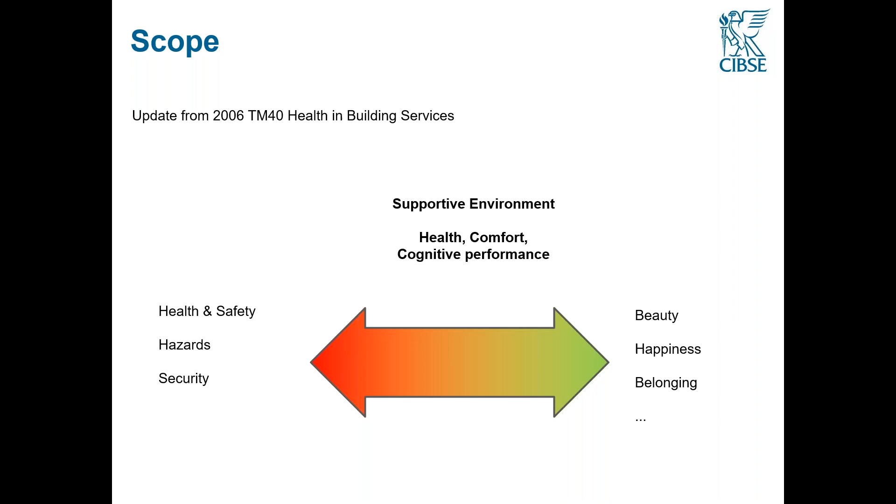The scope picks up from the old TM40 from 2006, but it has expanded it. And essentially, we cover what we call supportive environments. So the environments that can help deliver conditions for health, comfort, and cognitive performance. What it doesn't really cover in detail, though it hints at it, is the health and safety end of the scale, hazard, security, etc., which are well covered elsewhere. And on the other end, everything that contributes to our broader well-being, so beauty, happiness, belonging, etc. It's still just a CIBSE publication, so it focuses on health, comfort, and cognitive performance.

We're covering the main environmental parameters that we know affect health, comfort, and performance. So they are the ones I mentioned before: thermal conditions, air quality, etc. And also the interactions. It's obviously a little artificial to talk about them separately. So wherever we can in the publication, we point to where they link to other things. So thermal conditions and our perception of humidity are very linked, for example.

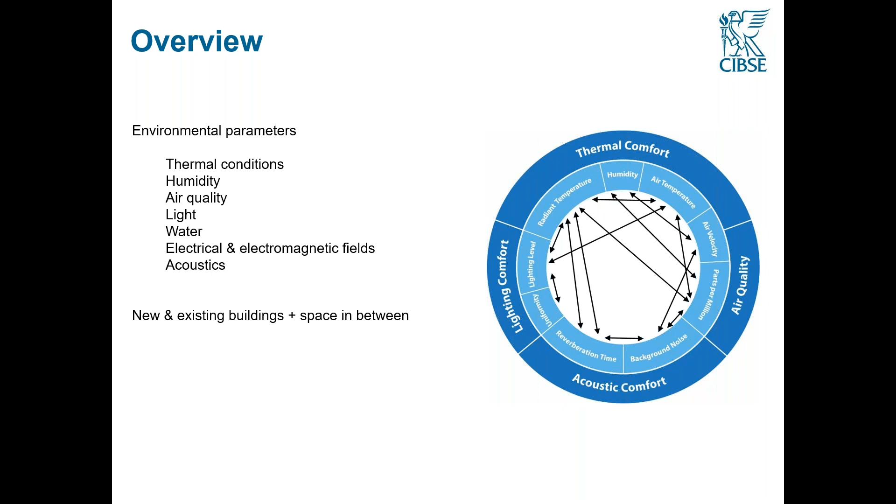And it's a publication that really covers all types of buildings, new and existing, housing and non-domestic, and also a little bit what we call the spaces in between, to highlight the importance that the outside environment can play, not only on the indoor environment, but also on our broader health and comfort. Today, I will focus mainly on indoor environments, but that chapter is there for you. I apologize for the quality of this slide.

Broadly, the approach we have taken throughout the guide is that on every theme, we first cover why. So why it's important, for example, why thermal conditions are important for health, for comfort, for user satisfaction. And that's essentially based on a review of knowledge of what's out there. Then what we call the what, which is how do you define performance criteria for health and comfort? What is a good indoor environment in order to be supportive to our performance? And largely that refers to regulation and the World Health Organization.

Then, once we have defined these performance criteria, we go into the how. How do you deliver these supportive environments? And that's the guidance, which starts from site assessments through to design, construction, operation, and maintenance.

And finally, we have on every theme what we call emerging themes, which are all the exciting bits of research and product development and innovation. So all these things are still debated and might be coming in the future, which hopefully will trigger research and innovation, but also highlight the limits of our knowledge. So places where you might want to put caveats to the guidance that you give to clients.

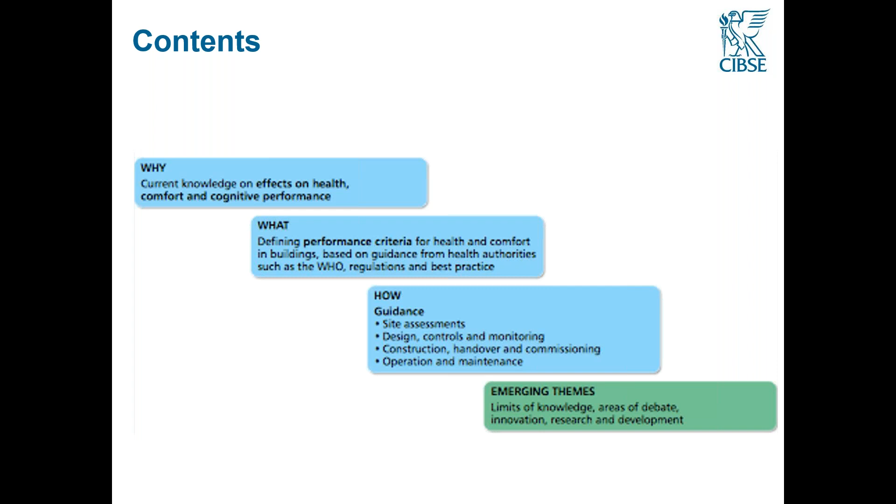Obviously it's a publication, so you can read it front to cover, but I suspect no one ever will. It's structured in such a way that you can actually pick and choose the way you read it. So for example, it may be that clients or people who are establishing a brief only want to read what we call the why. So in every chapter, they can read the first section and know, okay, I understand why all these factors are important if I want to deliver good conditions for health or good conditions for performance in an office. And similarly, to set performance criteria, you might only ever read sections 2 and 3 of every chapter.

So you can read it across or throughout, and it is structured in that way. Hopefully it also means that at some point it could become an online publication that is more modular than the traditional CIBSE guides.

We have tried to, obviously, as a CIBSE guide, focus on the core scope of CIBSE members. And that's places basically where CIBSE members can lead a design. So for example, HVAC controls, HVAC design, and if we were talking about air quality as an example, it would be the location of the exhaust, the ventilation strategy, ventilation rate, filters, etc.

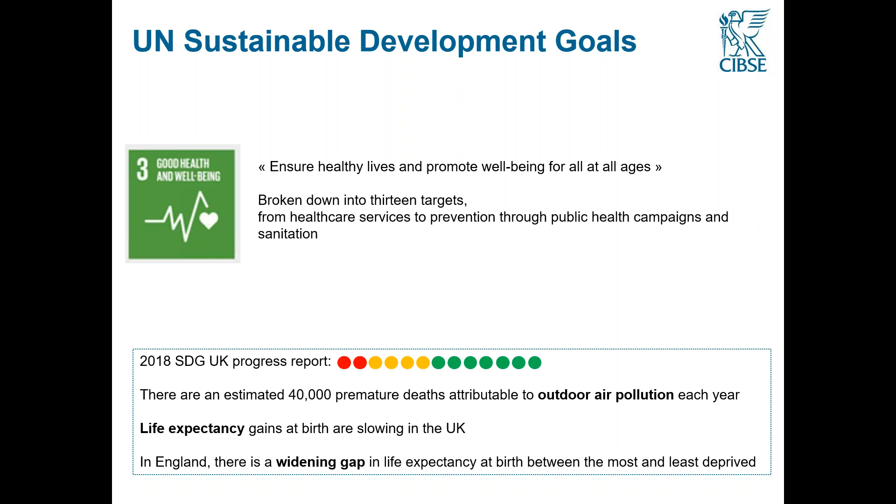Another very important part, and it's only under partial control of designers, but it's wider space planning, neighborhood planning, and cities, and how that can influence our physical activity, fitness, and health in general, and social cohesion. And the statistics in the UK are actually pretty stark. So the official statistics show that about half of adults and children have really very little physical activity, and this has lots of impacts on physical and mental health.

And obviously, this is individual behaviors, but there's a lot of evidence that shows that the way the built environment is planned can make it easier for us to make the right healthy choices.

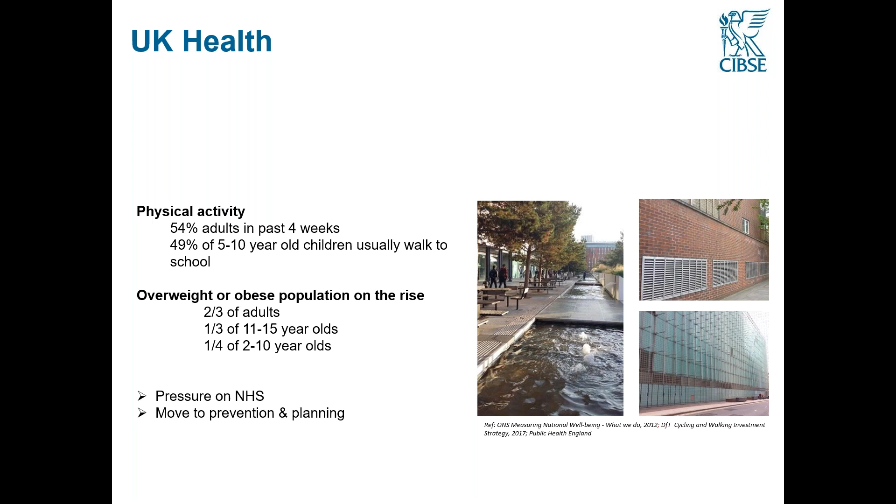Another driver we had in mind when we wrote the publication was health inequalities, and in particular the link to the built environment. So there are, in the UK, about 9 years difference of life expectancy between the least and most deprived areas in the country, and even more, 18 years of healthy life difference between the least and most deprived areas.

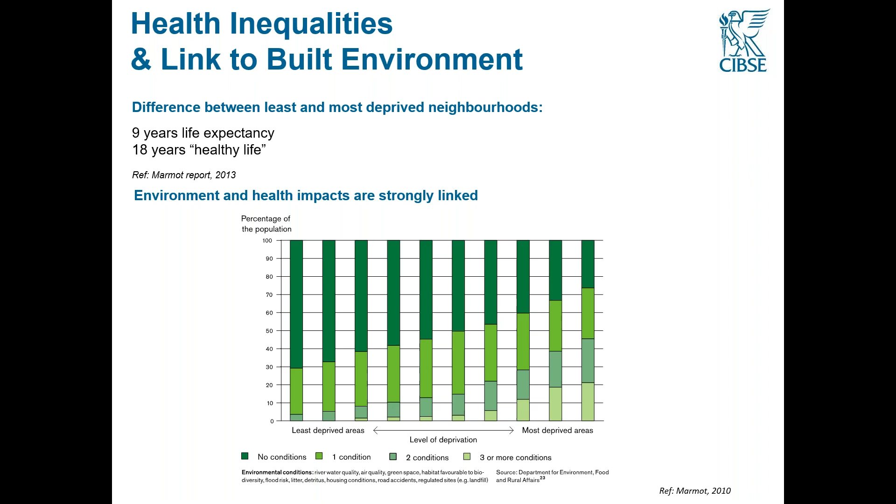So this is why we really wanted to talk about housing and neighborhoods and these spaces in between, so the provision of good air quality, of green spaces, of mixed neighborhoods that all encourage more healthy lifestyles and reduce the likelihood of inequalities. These are all official health statistics. We were really quite cautious about where we were getting our data from.

Beyond health, obviously, particularly for those of you who work on commercial offices, we know a very big driver for the health and well-being agenda is productivity. In the guide, we are covering that under cognitive performance because we don't only want to talk about, say, productivity in offices, but also other areas where it's quite important that we perform as well as we could, and in particular, learning in schools. So this is why we have tended to use the term cognitive performance.

We have done quite a large literature review of all the studies that show how indoor environments affect our performance. And that has essentially informed where we thought that some of the guidance needed to be adjusted.

There are a lot of studies on this at the moment, and some of them are of poor quality, to be blunt. So what we have also done in TM40 is give pointers to the sort of things that you can look for when you review one of these studies. So for example, if you read that changing a particular ventilation rate or changing a material in a building will make people X% more productive, that sort of statement.

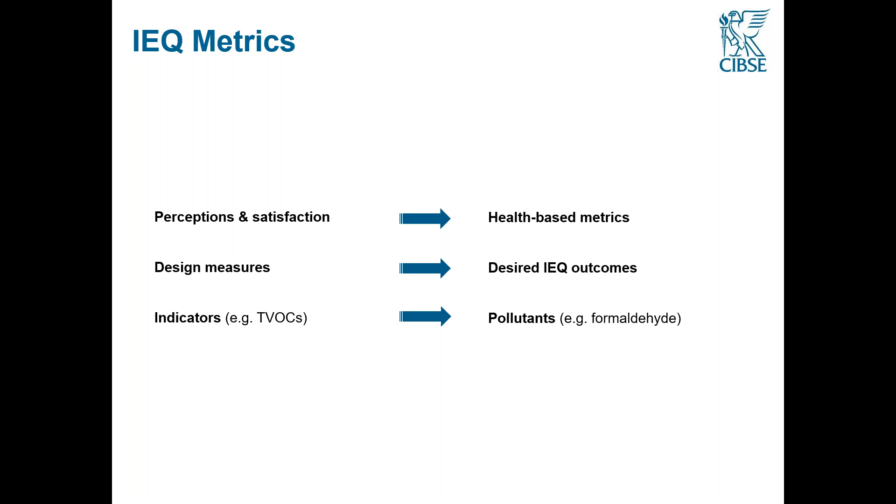So the approach we have taken in TM40 is to be much more specific. So instead of perceptions and satisfaction, we are looking to health-based metrics. Instead of design measures, we are recommending desired outcomes, and instead of indicators, we are focusing on actual pollutants. Which means that to define these performance criteria, we have gone back to health organizations, and in particular the World Health Organization, to regulations in the UK in particular, and that has allowed us to recommend performance criteria. This is a bit of a simplification, and I'll come to some of that. But in large part, we think that it covers the majority of environments to the best of our current knowledge.

And then in comfort terms, what is really important to remember, which the guide insists a lot on, is to provide user choice. So no one particular environment will satisfy everyone. And it's really important when we're talking about comfort to have some options for users to control, at least within a certain band, their environment.

I said this is a simplification because in very large part, the guidance that we give and which is available from health organizations is for what is called normal populations. And actually a very large part of the population is not that well covered by guidance. So vulnerable populations, infants, the elderly, people who already have medical conditions, pregnant women. Typically, the broad guidelines don't really apply to them that well, or we don't know whether they apply to them that well. Even in comfort terms, a large part of the guidance was historically based on men, much more than women in the surveys.

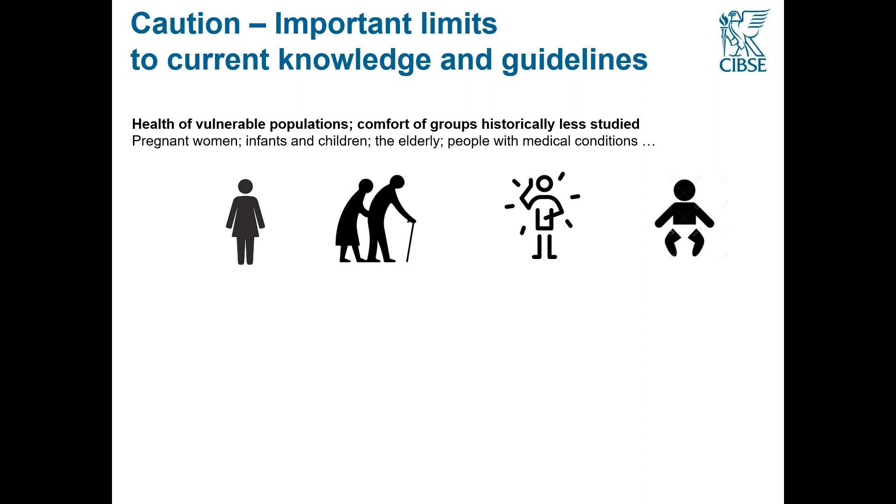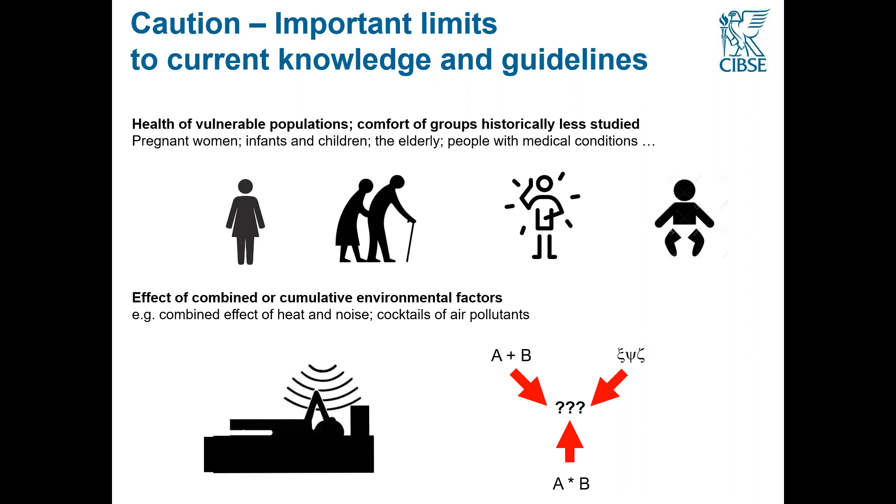Another really important simplification is that typically guidance is based on the impact of a particular environmental factor. So this pollutant has this particular effect, or that level of noise has that particular effect. There are not that many comprehensive studies that look at the combination of factors and the impact it has on us. And in fact, of course, in real life, we know that they're often combined. So we might be exposed to several pollutants. We might live next to a busy road, which means it's noisy, and we can't open the windows so it gets too hot, which is why we have to be quite cautious and why there is some margin built into the guidelines.

Now, this is the end of the overview, and I will go through individual sections one by one. A bit of a whisk through because it really is to give you a flavor of what is covered when the publication is actually available. So the first chapter is humidity, and there very largely we have reinstated and expanded a bit on existing CIBSE guidance.

So the effects of humidity: most of us are quite tolerant to a broad range of humidity levels, and the issues are in the extremes. So if there are too high humidity levels, you might essentially encourage the growth of mould or house dust mites, etc. Humidity on its own is not an issue for health.

It's what it supports. It's also an issue, obviously, for thermal comfort, and we know that actually in some climates it is becoming a very serious health risk because high temperatures and high humidity levels mean that our body can't get rid of the heat. And last year, there were the first headlines of actually hundreds of people dying in these particular climates.

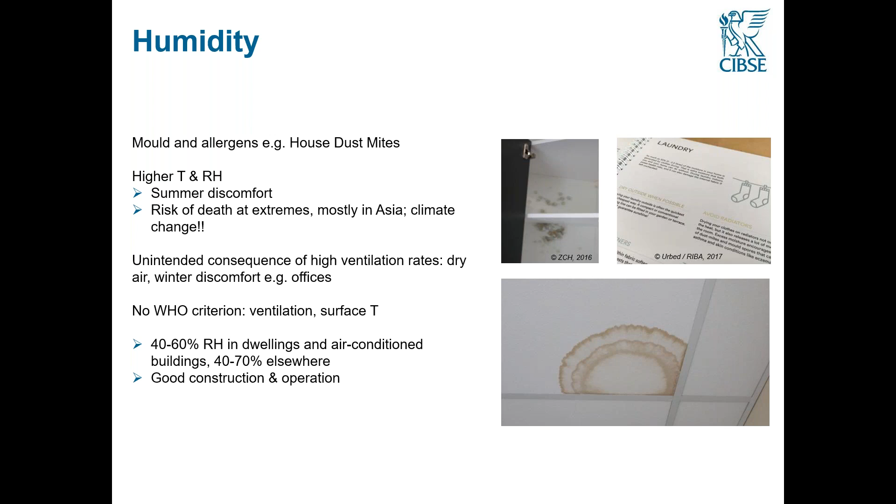The other end of the scale is very low levels of humidity, where again, it's not so much a health issue, but more a discomfort issue if the air is too dry. And we know that this is happening particularly in winter in offices with very high ventilation rates, where humidity levels can be quite low and complaints occur. There is no World Health Organization guidance on the levels, and it's more about a combination of ventilation rate and surface temperatures. And in that case, we have essentially retained the existing guidance from CIBSE on relative humidity rates.

Where it's really important, and here the guidance points to other publications because it's a huge topic on its own, is in the context of retrofit, and in particular the risk of moisture building up inside the walls or on surfaces and materials degrading, etc. We anticipate that this is an area that will become more and more prominent as we embark on large-scale retrofit to reach the UK carbon reduction targets.

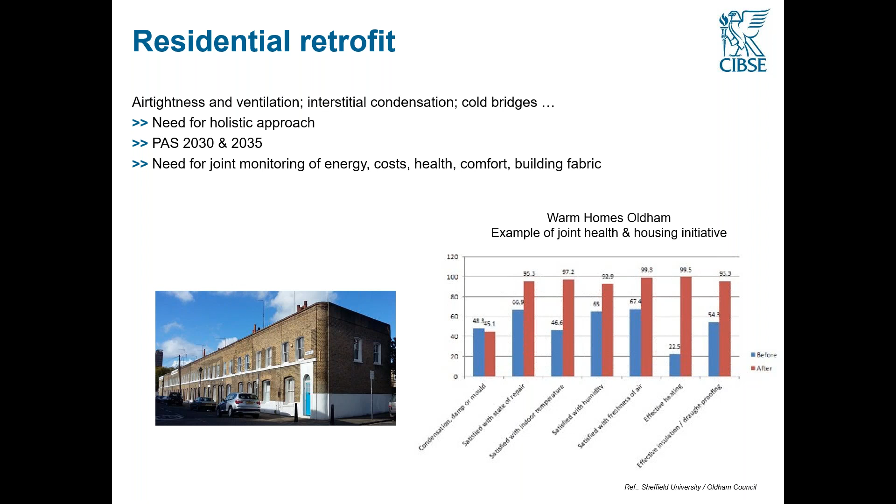So we have put a lot of references for more guidance on controlling condensation risk, and also guidance and case studies on retrofits that deliver both health benefits and energy efficiency benefits. Next section is air quality. As I said, this is one of the most significant updates compared to the rest of CIBSE guidance, and it's also the largest chapter in TM40.

Guidance we thought was really needed because, first of all, we now all know very well that outdoor pollution levels exceed guidelines across the world, really, particularly in cities. We also understand increasingly well how the combination of indoor pollutants is affecting our health, and there is no comprehensive regulatory framework that actually looks at indoor air quality.

To take back the example of the UK, Approved Document F, so guidance related to building regulations, is actually not really looking at indoor air quality. It very much focuses on ventilation, and it looks at pollutants from the indoors. So it looks at, for example, NOx levels as recommended guidelines, but from indoor sources. So it's not sufficient on its own, we think, to guarantee levels that would be in line with WHO recommendations, for example.

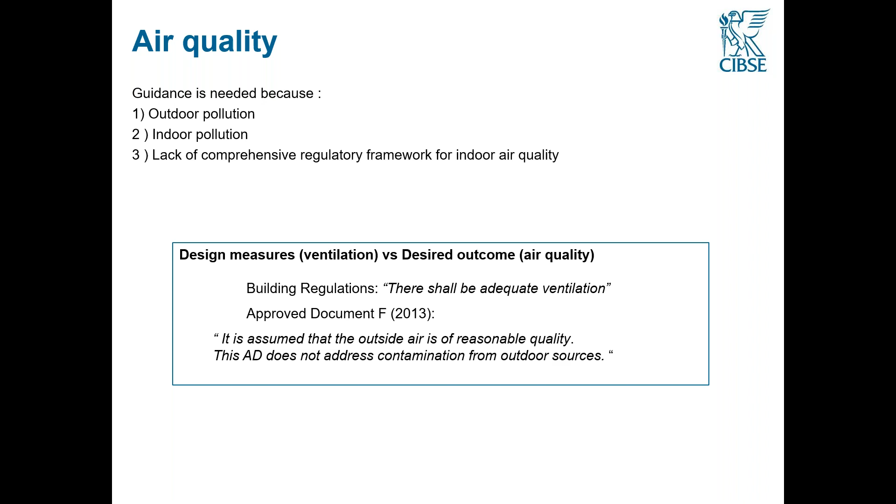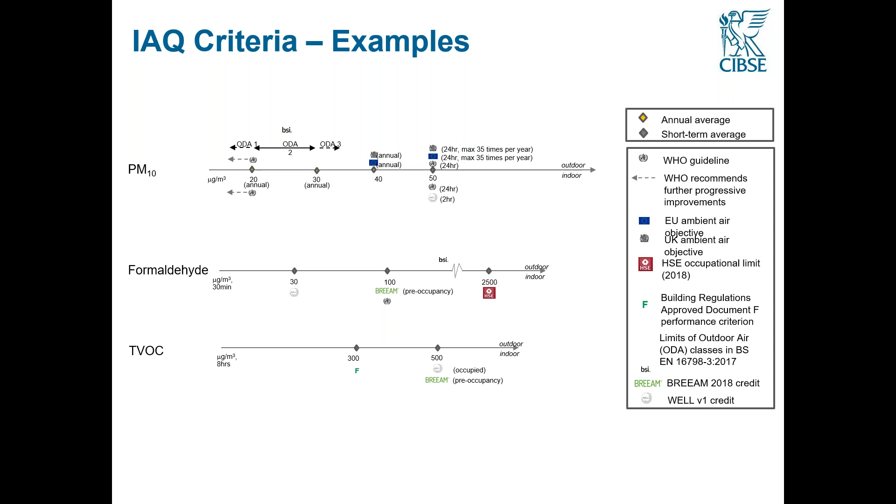This is just a very partial illustration of what I mean, but for example, if we look at these three pollutants, PM10, the WHO recommendations are on the lower end of the scale, so the left-hand side of the slide. And actually, indoors, we don't have regulations in the UK that look at this. The WELL standard has a recommended level, but that's about it. There's no indoor air quality limit in the UK on PMs, and there are some limits on outdoor levels of PM, but they're much higher than the WHO recommendations, and as we know, they are very often not met.

Hence, we thought the need for comprehensive guidance, and in here, CIBSE are quite in line with the way that other standards and other organizations are going. So for example, British standards and ISO standards are increasingly referring to the WHO. So it's not only CIBSE going down that route, Public Health England are also going in the same way.

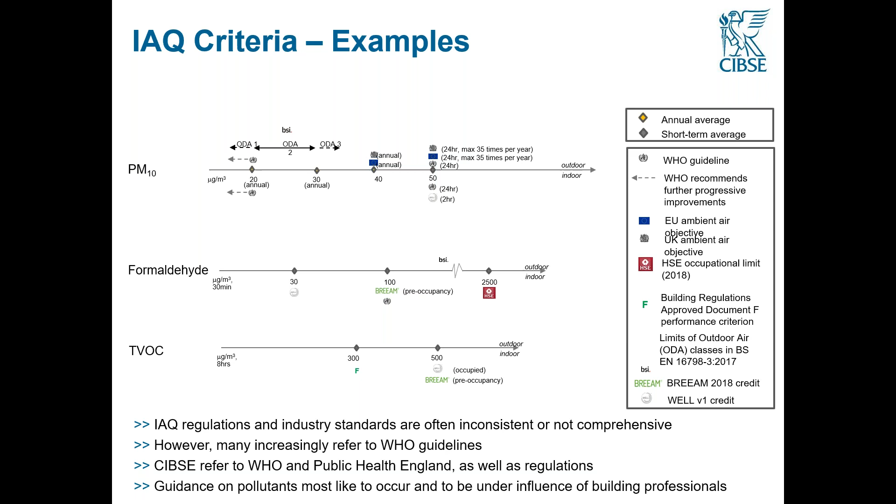We wanted to supplement this with guidance on where to start from, because otherwise you could be facing a whole suite, potentially a long list of pollutants without quite knowing what to prioritize. So in the guidance section, we have basically given advice on the most likely pollutants, starting with the outdoors, how to start your site assessment, benchmark levels of what you might be expecting in some cities, just to give you a feel for the most likely pollutants that you will have to address in your design strategies. In the UK, you can be pretty much guaranteed, unfortunately, that particulate matter levels would be higher than WHO guidelines.

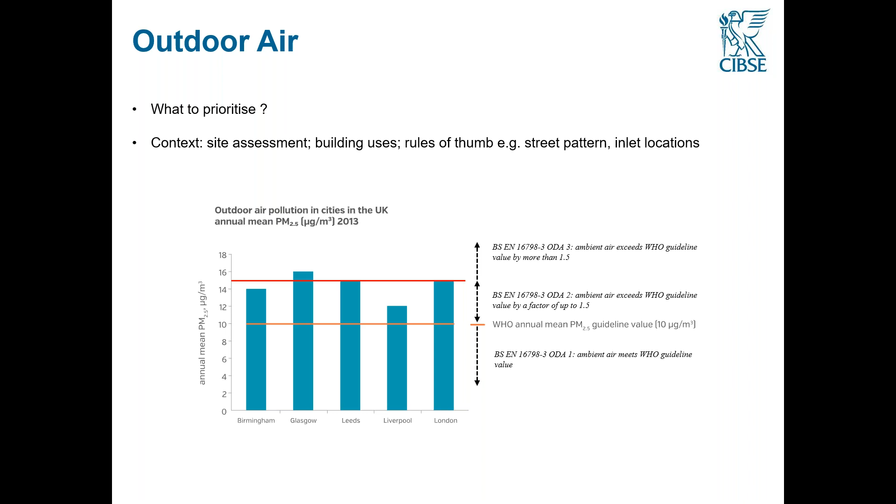We are also recommending a hierarchical approach. So as I said, starting with a site assessment at, say, the local authority level, and going to increasing levels of accuracy about your actual site, and taking that into consideration as a very first step in the way you plan the layout of your building and of your site.

Another area where we have updated the guidance is on filtration. There are quite a few new standards that hopefully will help you assess what filters are needed if you do need filters. We also have a small section on measures that can be taken through construction to ensure that your design measures are followed through, and then in operation and maintenance with quite a lot on monitoring, but also on the basics of good FM and good completion of projects, for example, ductwork cleaning, to ensure that pollutants that accumulated during the construction do not end up in the indoor environment.

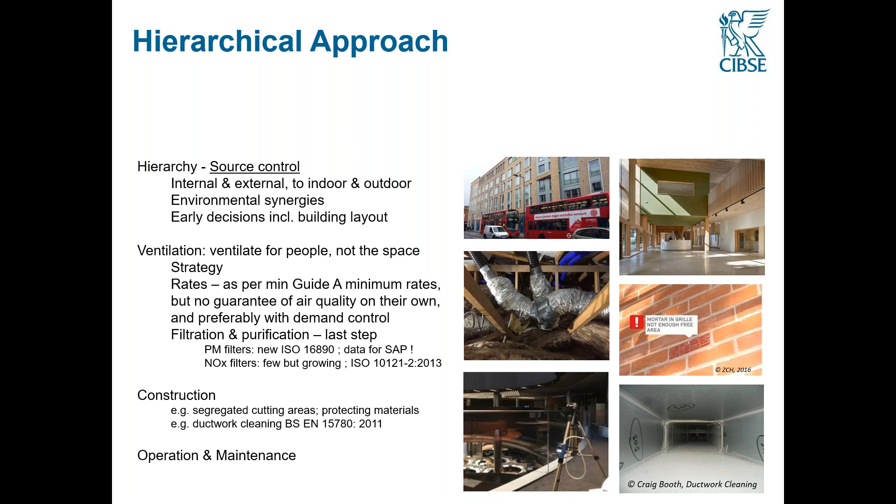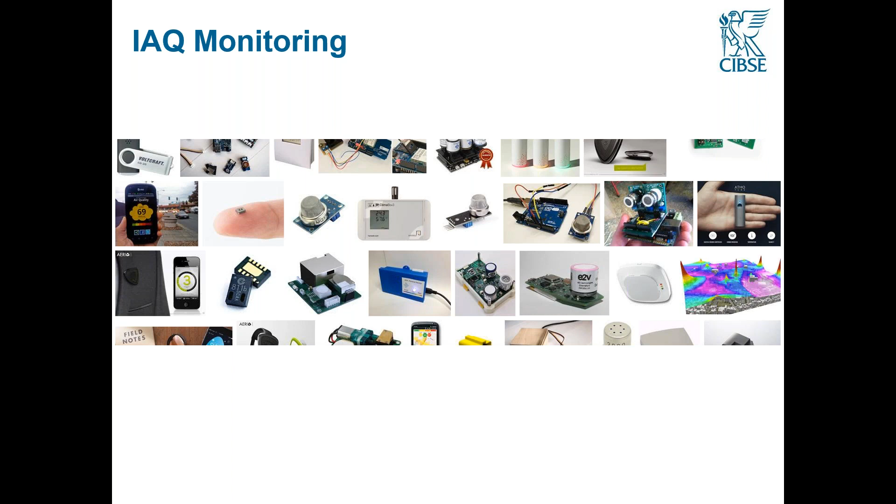Indoor environmental quality monitoring is a very big topic. We know in the industry there is a lot of work going on. We have summarized essentially the different types of monitoring strategies and also given prompts to help you develop the appropriate monitoring strategy, starting with why do you want the data? What sort of data do you want?

And it's important to differentiate a contractual context. For example, you might want to prove or to check that what you had specified has actually been delivered. And in that case, we would recommend using accredited labs and accredited equipment, for example, following UKAS. That's one end of the scale.

If on the other hand, what you want is more to follow general trends and to raise awareness of indoor environmental quality, you may be able to go for sensors that are much less accurate, but which show directions and which are cheaper, and you can have many more of them. They can be more interactive, etc.

If you're interested in this topic, our CIBSE Air Quality Working Group is looking at it, and they produced last week a short publication on VOC. So they are very much continuing the work that TM40 started on this topic.

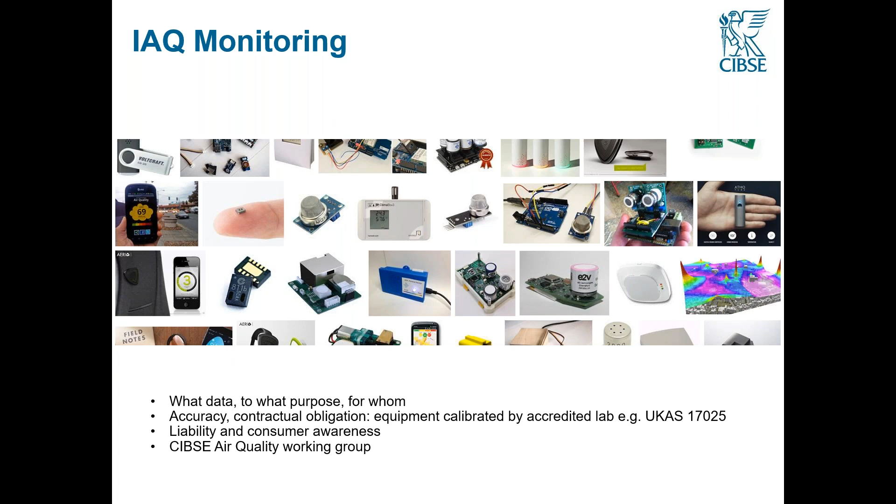R&D is very, very active in indoor air quality. So we have quite a big section of emerging themes. I'm sure you have heard about some of them. So the very exciting ones are the impact of plants. Our review shows that if you do have impacts of indoor air quality from plants, they are likely to be quite small. It's not a reason not to put plants into buildings, obviously, but don't expect that you're going to have a massive impact. However, again, this is an active research topic, which CIBSE are still looking at with other universities.

We have also given pointers about how to assess the claims made by different manufacturers of products. So for example, wool absorbs VOCs and titanium dioxide paints absorb VOCs. Some of these products, at best, they're not doing much, but they're not doing much harm either. Others, it's fairy tale promises, or potentially actually they have a detrimental effect.

So you might see a study that shows that a particular product absorbs or degrades or magically makes disappear particular pollutants, but what you need to ask yourself is, well, what is the process by which that pollutant apparently disappears? Is it being turned into a byproduct that is actually worse than what was there in the first place? So we have given pointers on this as well.

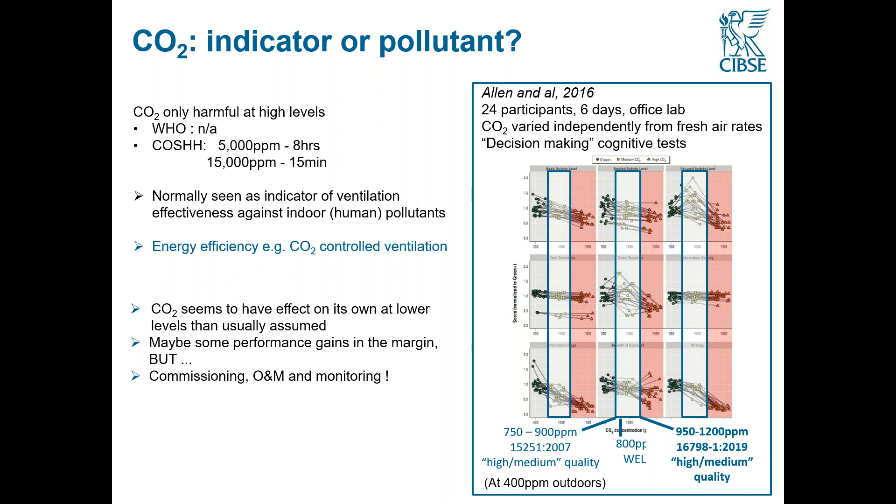Right, so now moving on to the other sections, which are much smaller. Thermal conditions. Broadly speaking, there is not that much new material in TM40 or new recommendations. What it does is collate the knowledge up to date. So obviously we cover overheating risk, and in there we very much refer back to TM59 and TM52. But we also, and it's important to remember it, cover winter comfort.

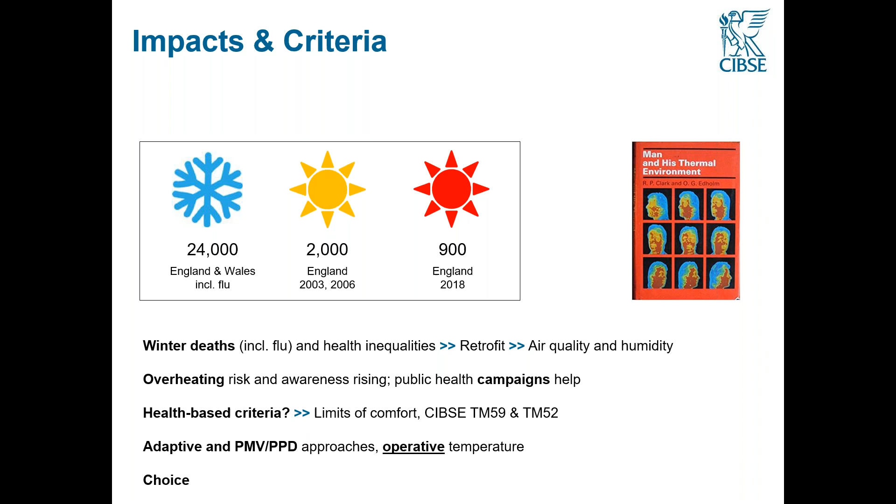Now, we hear a lot about deaths related to heat waves, but in the UK, there are many more winter excess deaths than there are summer excess deaths, even in heat wave years. It's a bit complicated because winter excess deaths include flu, and there's no statistics that manage to differentiate the impact of one and the other, but it still dwarfs and is still predicted to dwarf with climate change in 2050 the number of deaths from summer. So it's still really important to think about winter comfort, particularly when we talk about housing retrofit.

We're talking about natural ventilation, external shading, and the importance of user control so that you can cater for different populations, including women who supposedly are always cold when actually, well, maybe temperatures were not designed for them in the first place. We also very clearly link that chapter to the acoustics guidance because we know that a lot of overheating cases in residences are very strongly linked to noise levels outside, preventing windows from being opened too often.

The next chapter is light, and it's again quite a substantial chapter because light affects us in so many ways. One of the impacts is radiation, and there isn't that much new guidance in TM40. The other impact is visual aspects, and again, TM40 there is very much in line with current guidance from CIBSE and the Society of Light and Lighting.

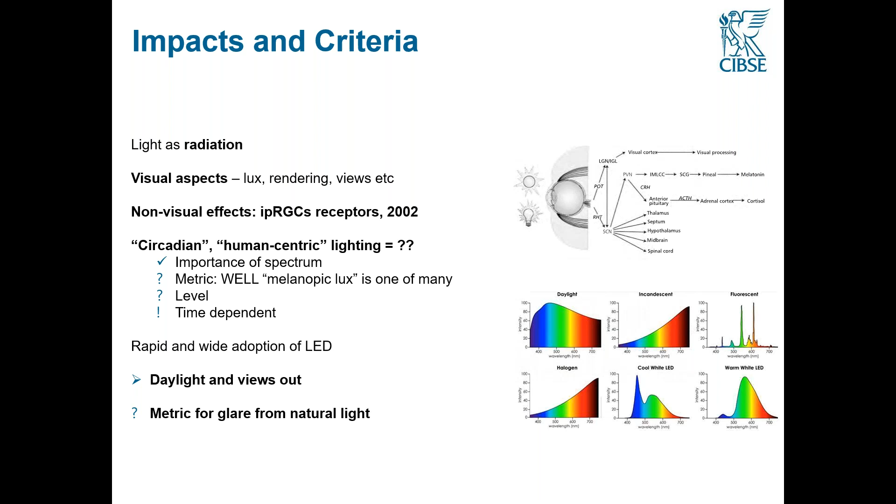So very broadly here, TM40 gives a summary of what we know, of what we don't know, and we have concluded that we are not at the stage where we can recommend a metric and a particular level, but what all of this new knowledge does is reiterate guidance that is already there on the importance of daylight, the importance of views out, and the importance of good products so that we don't end up with products that are excessively bright, excessively cool, excessively glary, etc.

That develops what I've just said. So the importance of daylight, again, the importance of controls, for example, task lighting, and something that often designers find difficult to influence because of the way buildings are procured, which is the interaction with interior design. So where furniture is and the types and the colors of surfaces. Very often lighting models are done on standard assumptions, when actually, wherever possible, we should collaborate with the interior designer.

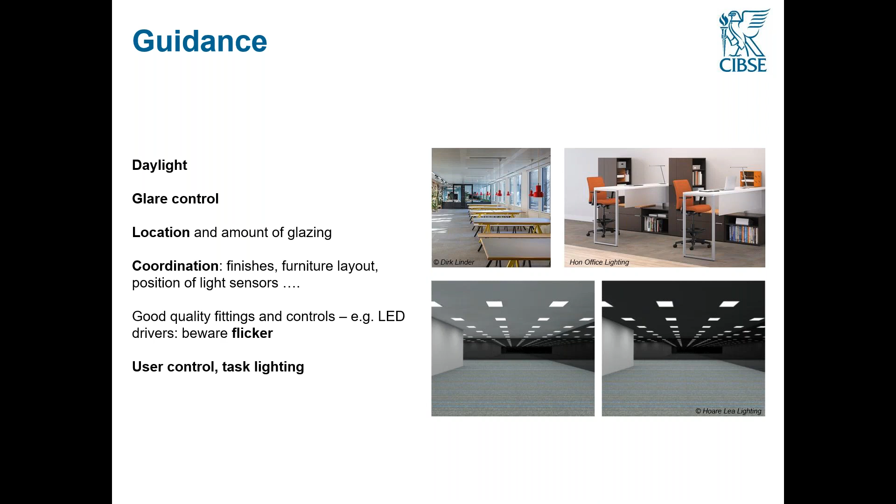So the example at the bottom of this slide, the two images show the same lighting and environment, but with very different surfaces, and the impression is that it's much more gloomy and much darker on the right-hand side. So it's really important where we can, and I know it's difficult on some projects, to be involved with the fit-out designers to make sure that everything is coordinated.

I'll now go quickly over the last few sections. So in acoustics, a big topic that we are mentioning is overheating in residences. And there are different parameters. So as I've said, the importance of building layout at the beginning, of establishing what the outside conditions are, and wherever possible, having residences and bedrooms away from sources of noise, ideally dual aspect, so that you have potentially an elevation that is quieter, and you can also, if you can, open on both sides and create a breeze, which helps both overheating and maybe air quality in some cases.

We are also giving a little bit more guidance on open plan office layouts, because we know that with a big trend in open plan offices the last few years, there has been a bit of a, I don't want to say backlash, but a revisit, so that different needs are catered for. So providing different types of spaces for different activities.

And we're also insisting on criteria for noise from building services. Again, we know that this is quite an issue in residences. So ventilation systems, whether they are MEV or MVHR, which are poorly installed and commissioned, which means that they are either switched off by occupants, which means that indoor air quality becomes pretty bad, or run but are very noisy and disturb occupants.

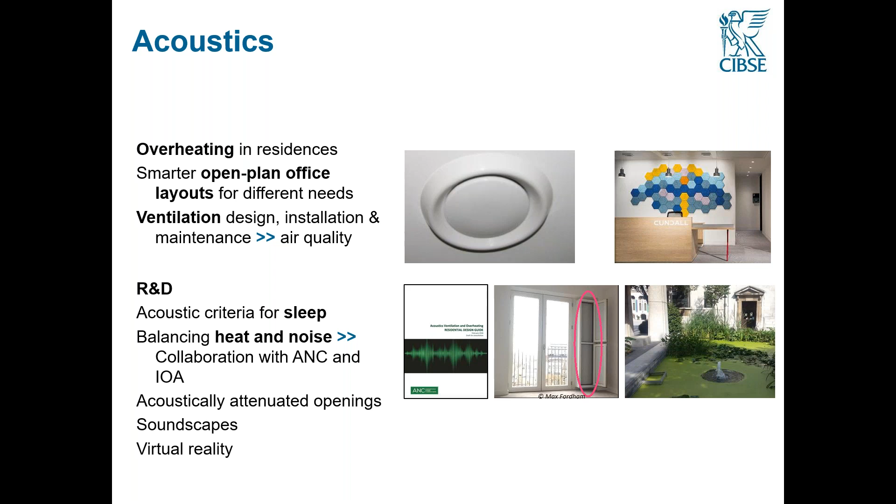There are very interesting areas of research as well. We have collaborated on this topic with the ANC, who are developing guides. So that's the Association of Noise Consultants, who are working closely with us to develop joint guidance, or guidance that refers to ours, on heat and noise. There are also developments such as acoustically attenuated openings, so natural ventilation with acoustic attenuation, trying to get the best of both worlds, essentially, and very exciting developments in soundscapes, quite often linked to the benefits of the natural environment.

Electromagnetic fields. Now, we're actually quite pleased to have this chapter because it's not often talked about in the sphere of health and well-being, but it's a really important field for our health. As the WHO say, it's actually one of the factors of our environment which is most changed when we look at the last 20 years. You know, the mobile phones, Wi-Fi, electrifications around the world, etc. And we shouldn't dismiss the anxiety that this is creating among some populations.

So what this chapter does is give an update on knowledge of the effects of electromagnetic fields, and very, very recent updated guidance from WHO agencies on this. Up to last year, the guidance on exposure from this field was actually quite old and only based on short-term exposure, when Wi-Fi didn't even exist. So it's quite reassuring that now the guidance does take these new types of fields into account.

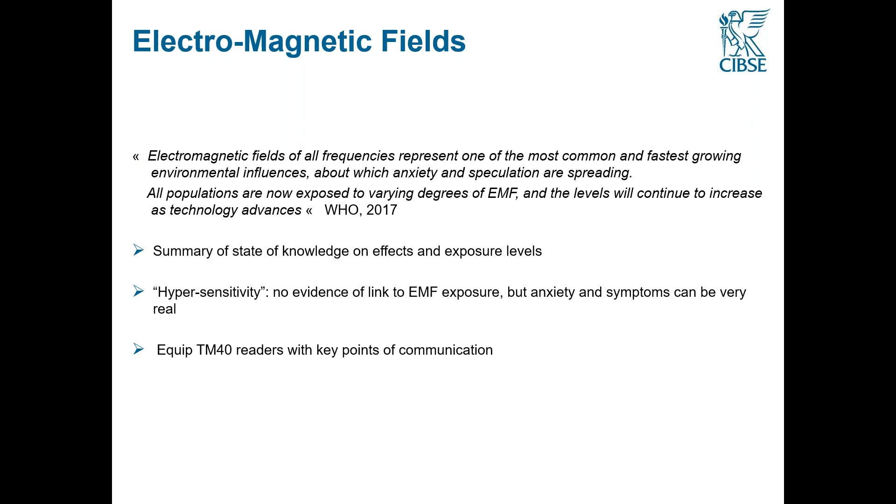We're also providing tools so that if you do get questions on projects from people who are maybe quite anxious about, for example, the impact of a transformer, you hopefully have some pointers to the sort of things you might be able to tell them, the exposure levels they might be exposed to and the guidance from officials. The good news is that in the UK, Public Health England say that broadly we're fine. Exposure levels as measured generally are lower than the recommended maximums. And so that's the first piece of good news.

The other piece of good news is that having now been exposed for several decades to some of these fields, it seems that the original guidance is still valid. We haven't necessarily discovered long-term effects we didn't know about, which would require a revisit of our guidance. I would really urge, however, people to stay informed, because I have noticed increasingly members of the public being quite anxious about things such as 4G and 5G. And there is really a lot of misinformation, sometimes because communications from health agencies isn't very clear. So hopefully this chapter will provide some tools.

Last chapter is water quality. There's not that much new guidance again, but we wanted to review what we knew of what is happening in the UK in particular. And we are quite conscious that schemes such as the WELL Building Standard have sometimes, maybe inadvertently, created the impression that water quality needs to be improved. Now, in the UK, 99.96% of tests meet the required standards, and in very large part, the UK requirements are more onerous than the WHO. And actually, you may be more at risk of creating a hazard by adding, say, filtration or purification systems, especially if they're not well maintained.